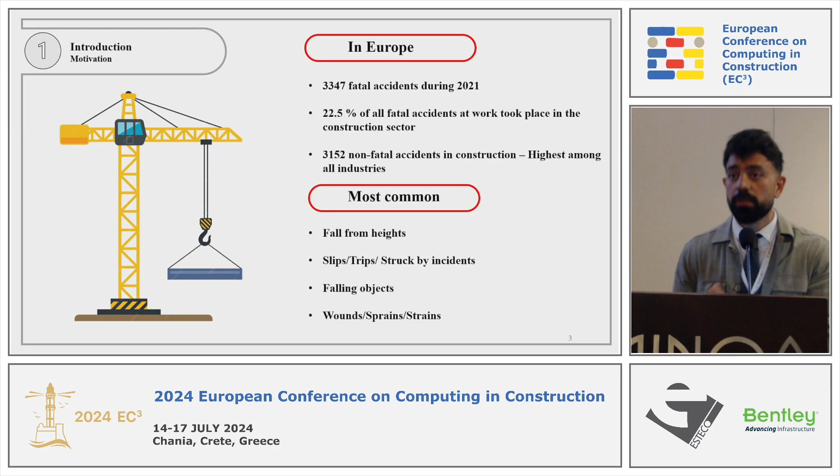So we might be asking ourselves, what are these most common accidents that are happening? Well, the number one accident that we see, unfortunately, is falling from heights. We also see slips, trips, and getting struck by incidents. We see falling objects, and we also see wounds, sprains, and strains. While wounds might be attributed to, for example, misuse of equipment, we see sprains and strains, which is another category here, where we also see high work-related musculoskeletal disorders among construction workers.

What are the reasons behind this?

The closer I am, the better.

So what are the reasons behind these accidents? Well, we can say number one is definitely lack of fall protection. We see, especially in small to medium enterprise companies, and especially where I come from, Kuwait, a lot of workers cutting costs by trying to reduce the safety protocols in a way that they could improve productivity, but then it turns back on them.

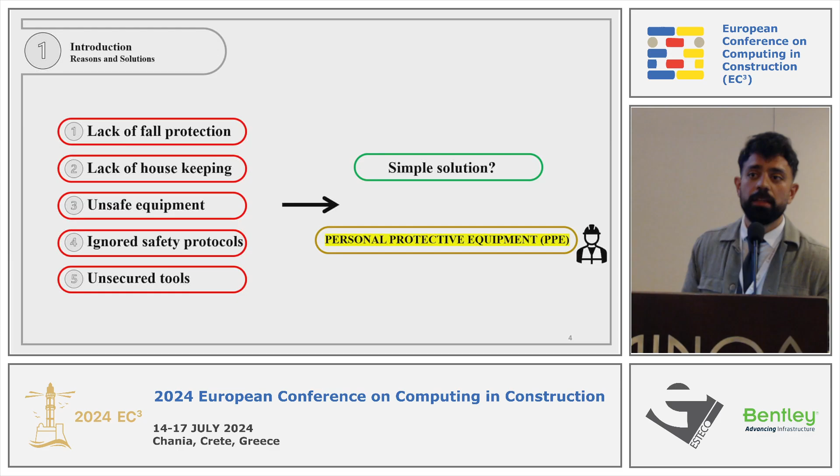We also see that there is a lot of lack of housekeeping. Again, I'm talking about small to medium enterprise companies. We still see that those contractors try to neglect housekeeping, thinking that it could also improve their productivity. We also see unsafe equipment, so workers or maintenance engineers tend to irregularly check the current status of the equipment being used. Ignored safety protocols, unsecured tools, all these are common problems that might be mitigated if proper personal protective equipment is used.

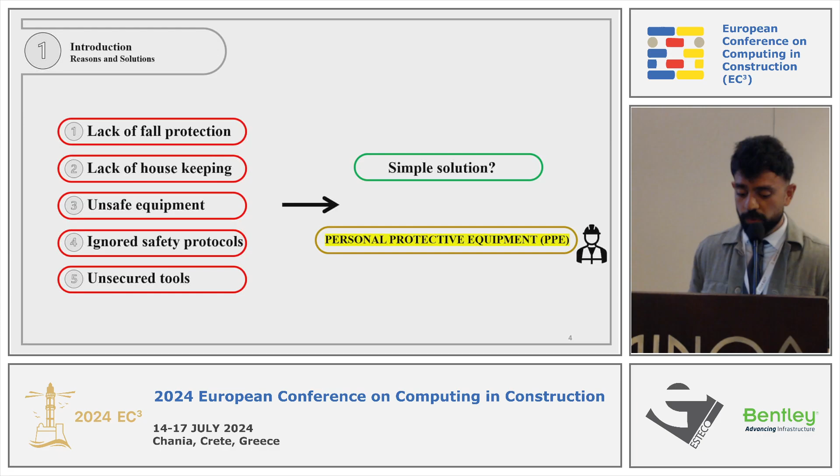But then if that's the case, why do we still have problems? And again, back where I was working as a site engineer in Kuwait, I had a lot of problems with workers adhering to the safety protocols. I was running after each and every worker, making sure that he's wearing his helmet, making sure he's wearing his gloves, his shoes. Again, there is some negligence towards wearing PPE.

Of course, one of the causes behind this is discomfort. So they tend to feel like it's kind of annoying and they just want to take it off. It is counterproductive. Another thing is the perceived inconvenience, which falls again to the discomfort part. They feel like if I take it off, I can be more productive. And again, back in Kuwait, most of the workers are getting paid on an hourly basis, so the more they complete, the more money they would get. So they always feel that this equipment kind of hinders their productivity.

Lack of awareness. Again, this is a problem that can be improved through campaigns and trainings. False sense of security and hot climate. I mean, Kuwait has a temperature in summers of 50 degrees and above, and we tend to have workers regularly taking their helmets off, which I kind of understand, but you know, we still need to care about their lives.

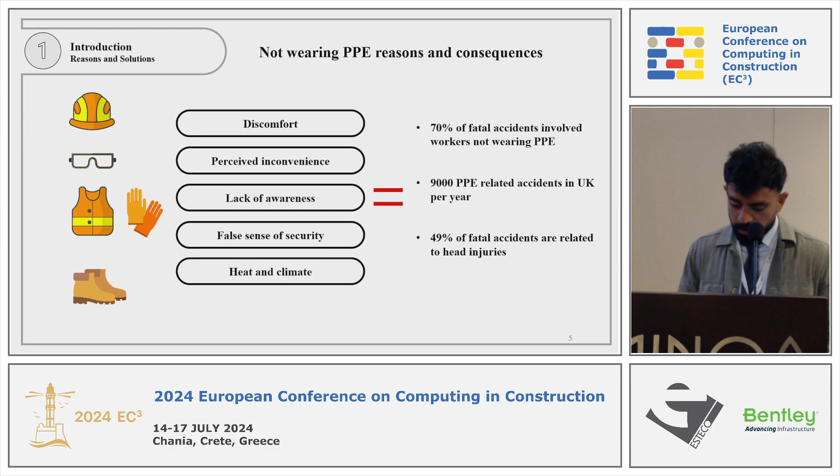How can we solve this problem, or what are the possible solutions that we can use? Well, one of the direct solutions we think of is improving the comfort of the material, of the equipment. So we can design or redesign the PPE equipment in a way that maybe causes some sort of an attachment to the worker, so he is kind of attached to some sense of belonging, could be a possible solution.

We also need to ensure that small to medium enterprise companies are well aware of the safety protocols and ensure that they supply the required PPE under some government governance. Of course, fostering a safety culture. But one of the most common or possible solutions that we decided to look at is basically monitoring compliance.

Currently, the general practice that we see is monitoring compliance through manual inspections. So we would usually have a safety engineer visiting the sites on a regular basis, making sure that the workers are complying, or someone like me running after the workers, making sure that they are wearing their equipment. Is it practical? Well, it is practical to some extent, but once the safety engineer leaves the site, again, you might see that the workers tend to remove their helmets or remove their shoes or whatever it may be.

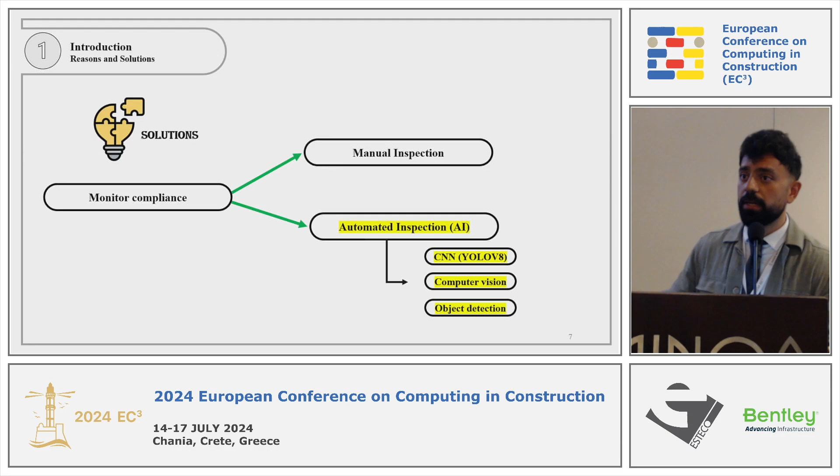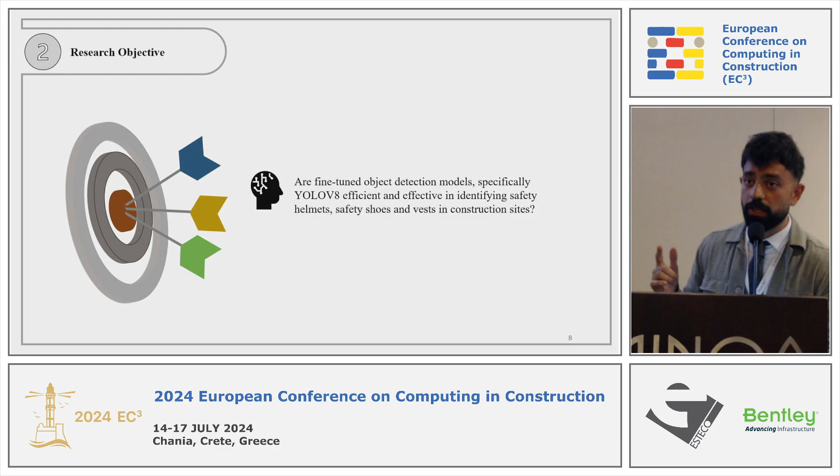So we decided to conduct this exploratory study where we aim to look at if fine-tuned object detection models, specifically YOLO V8, are efficient and effective in identifying safety equipment. So initially, we decided to look at safety helmets, shoes, and vests.

What we basically did is retrain the model by collecting a data set of around 4,000 photos. The majority of the photos, approximately 70%, was used to train the model, while the other part was used for the validation. We used a software called LabelImg and, using some Python coding, we were able to transfer the images to a format understandable by YOLO V8.

We did around 6 classes. So the first classes were helmets, vests, safety shoes, and then we also created the vice versa. So no helmets, no safety shoes, and no vests. And we trained this model for approximately 100 epochs.

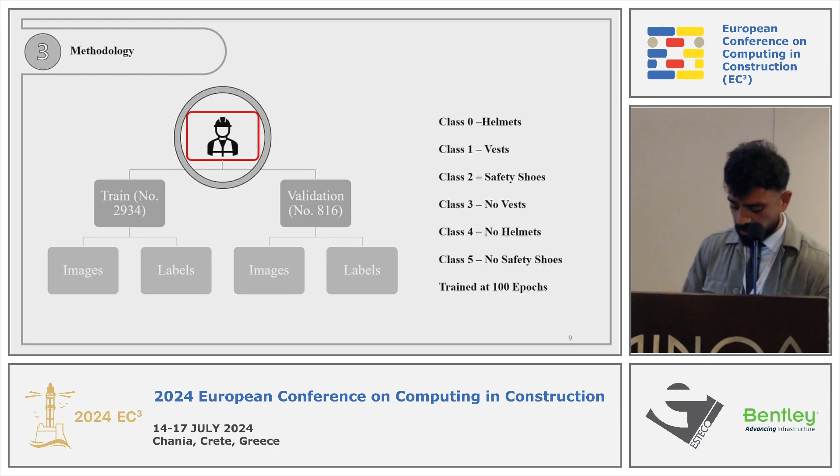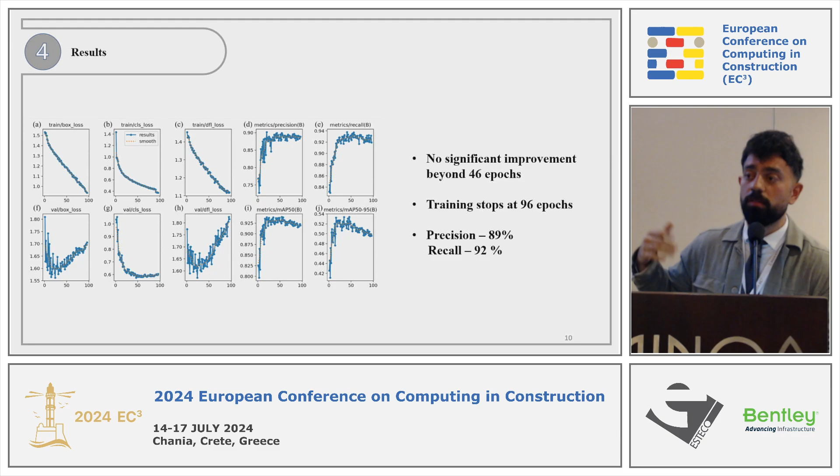The results were quite promising in relation to the validation. We saw that we achieved a recall of around 92% and a precision of 89%. We also noticed that after 46 epochs, there wasn't any significant improvement in the model, and the model training was stopped at the 96th epoch. Beyond that, we see that the algorithm tends to overfit. But the most important part is the results and how the results reflect.

So what we did, we also tested the model against 300 images, and we see that it is quite accurate in detecting helmets and vests, but not so good in safety shoes. And that's because safety shoes take different shapes and designs and different colors. So one of the limitations here is that we need to increase the data set for the safety shoes in a way that it could encompass a higher number.

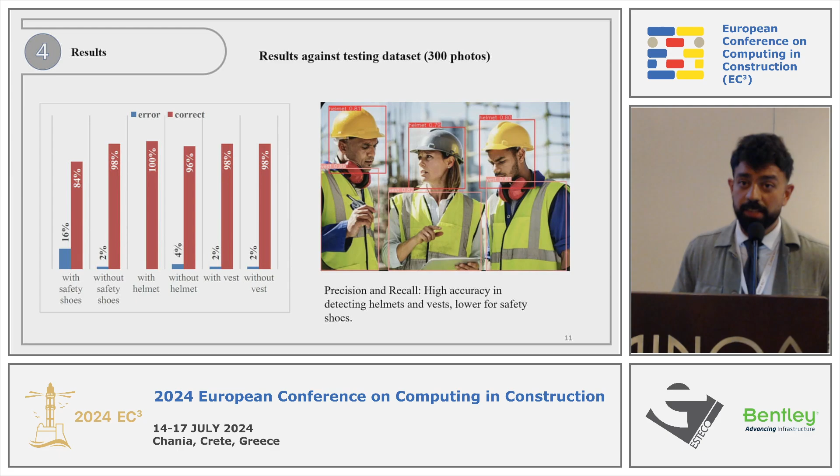Unfortunately, we were unable to test it in sites, and this brings me to the next steps. One of the main issues that we're facing is the ethical approvals. A lot of construction companies are very hesitant to have these cameras installed in their sites. They're either skeptical, they don't want to be monitored, or they are kind of afraid that we could use these videos against them, because we also see a lot of safety violations in the small to medium enterprise companies. So this is one of the limitations we're facing.

Another issue we're looking at is to optimize the model. Currently, we have also added around 3,000 new photos. We introduced, of course, fall protection. I guess someone has in mind, well, you said that fall protection was number one, and then you are looking at different things. Well, we have also added the fall protection equipment, so the safety lanyard and safety harness. And this is where we are not only looking at whether the worker is wearing it correctly, but whether he is actually hooking the lanyard to the guardrails.

Of course, ethics is always the problem in regards to AI. So we also need to ensure that the data set is diverse enough to avoid any bias.